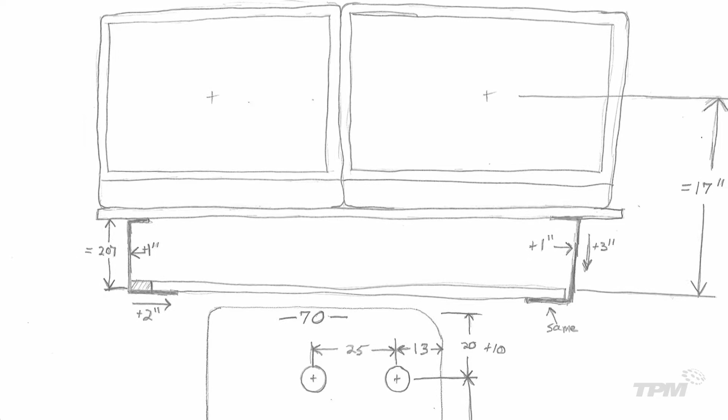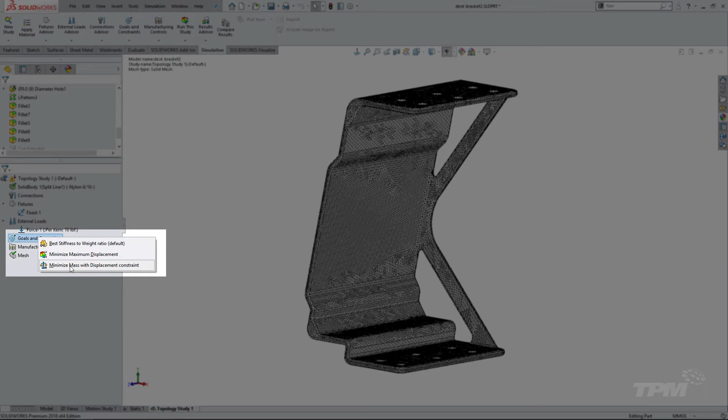So after taking some measurements and sketching out some ideas, I modeled a simple bracket shape and went to work doing some static analysis. The results showed that I had plenty of strength, so it was time to remove some material. Setting up the topology study was as simple as drag and drop from the static study. I then input the goal, selecting to minimize mass with the displacement constraint, and I ran the study. Within minutes, I had a good visual where I could remove material.

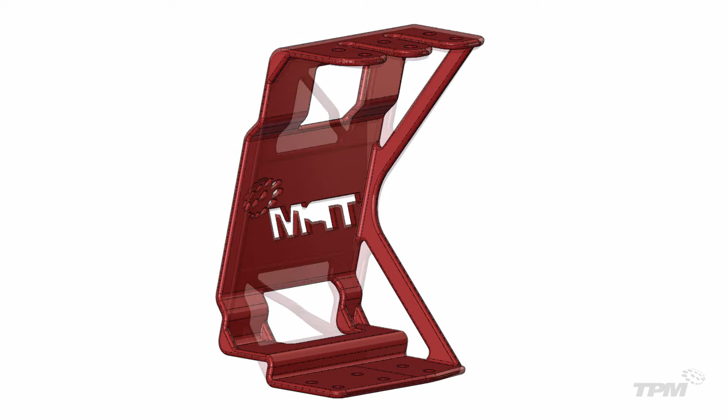Saving the resulting geometry as graphics bodies allowed me to visually overlay while I was modeling so I could reference and cut away some material. I did some trial and error and ran through a few iterations until I felt I had the design just right. It was a combination of exactly what topology study results showed me and a bit of adjustments for aesthetics.

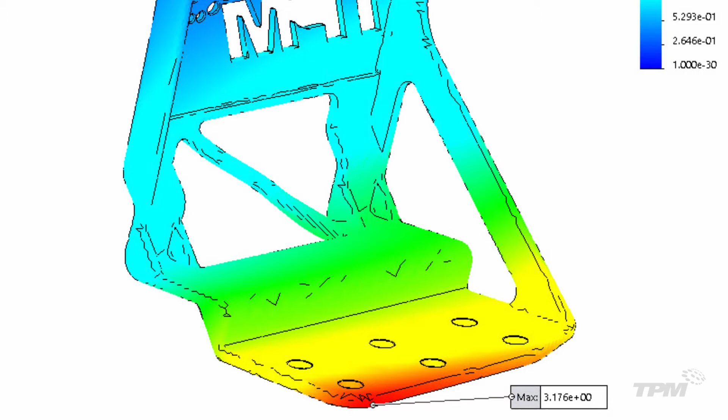Before printing, I ran a final, high-quality static analysis and confirmed the desired low deflection of the new design. In fact, I was actually down to 3.2 millimeters compared to my initial 4.5. I used this process and what I learned to model the opposite side and further improve on the technique and the final design.

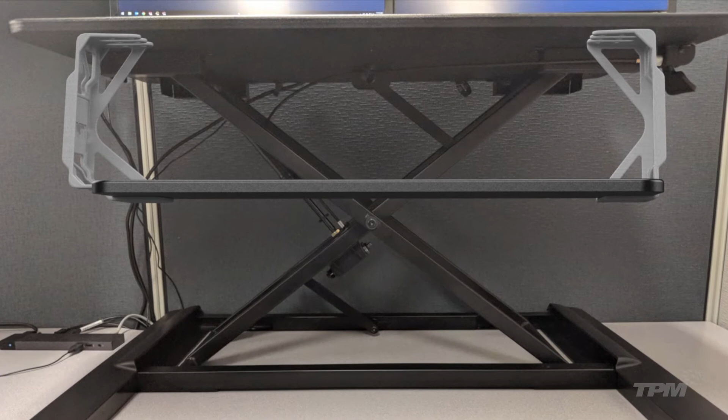Once finished with the modeling, I was able to catch a few last-minute issues by assembling in SOLIDWORKS, taking some measurements, and even rendering in Visualize. I'm glad I spent a few minutes doing this because I was able to get the design right on the first print. The entire process worked seamlessly, and topology enabled me to reduce 31% of the material used to print my brackets. This was a significant savings. Final assembly was a perfect fit, and I'm now enjoying a customized desk complete with logos.